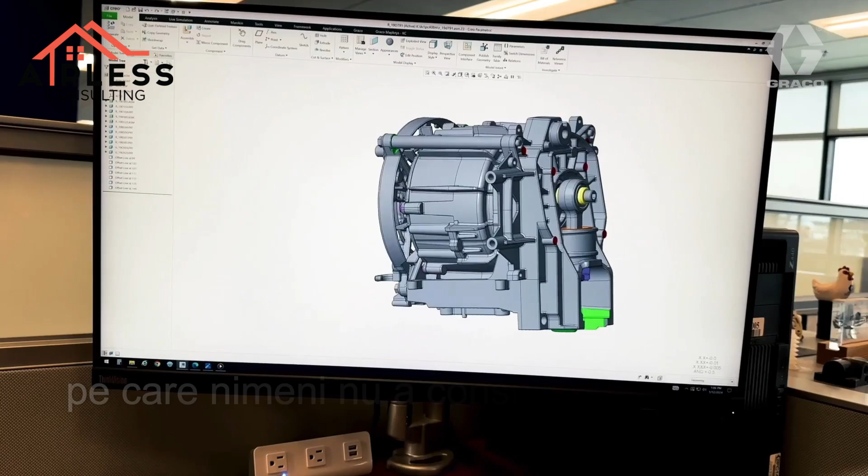Welcome to the future of airless spraying. Experience Airless like never before. Today we take you on a journey which no one even considered to be possible. Today you will experience once again what it means to work with Graco, leading from the front through innovation.

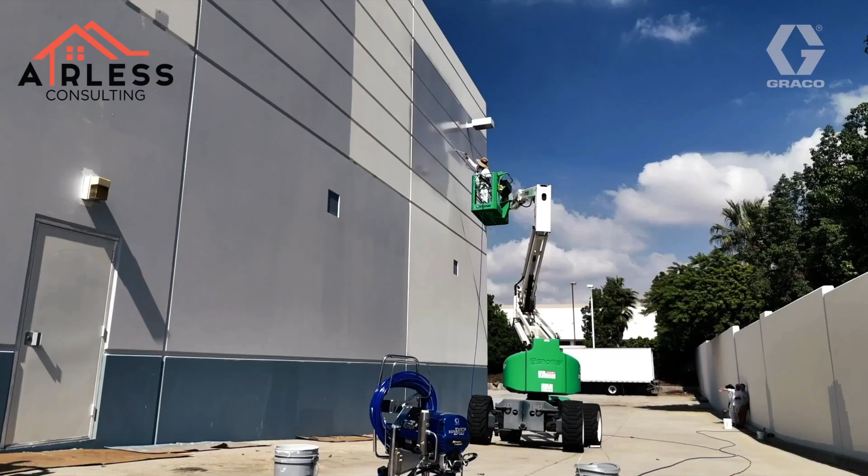Today is about you, our partner in business and success, always striving to deliver the best solutions in the world. With our breakthrough XT motor technology, we deliver the first and only motor specifically designed for airless spray, delivering unmatched performance. XT: Extreme Torque, designed, engineered and manufactured by Graco.

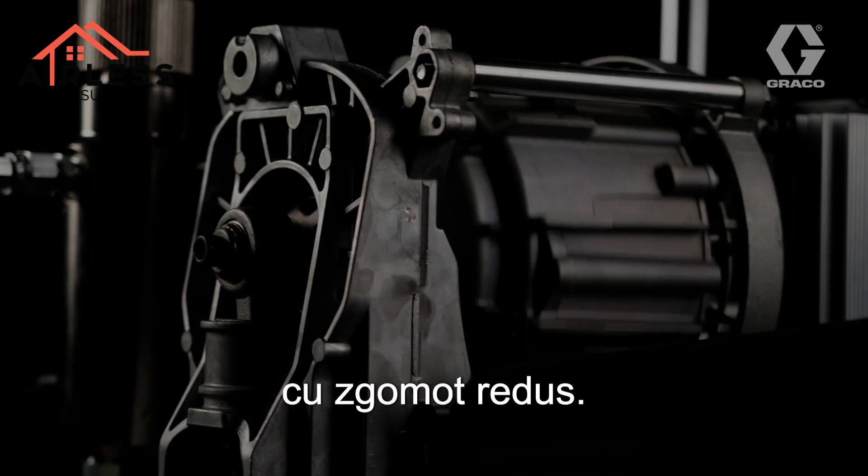Bringing breakthrough spray control and performance, breakthrough pump life and serviceability, breakthrough low noise construction. We have got you covered, now and in the future.

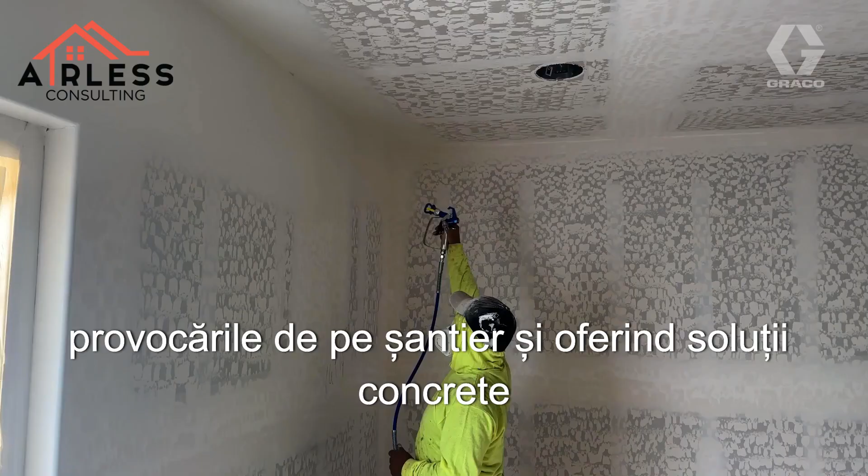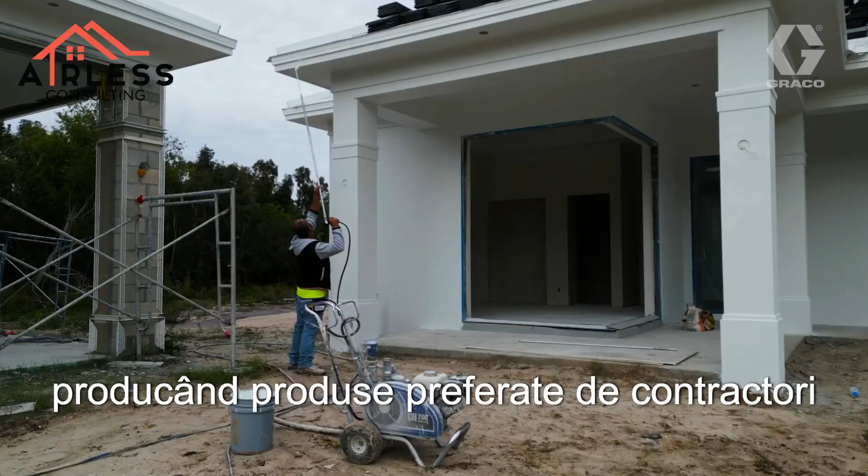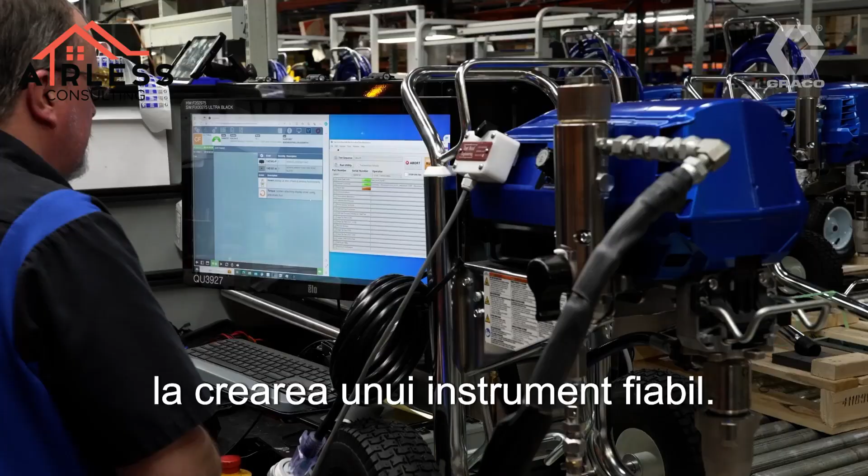By understanding job site challenges and providing concrete solutions to contractors' needs and requirements to get the job done right. By protecting your investment with a range of features during challenging macroeconomic times. By producing contractors' preferred products that are ready to be held by hands that create, transform and inspire. From the spark of an idea to the creation of a reliable tool, this journey showcases the dedication and passion that defines superior manufacturing. From motor to gun, discover the XT difference for yourself and experience Airless like never before.

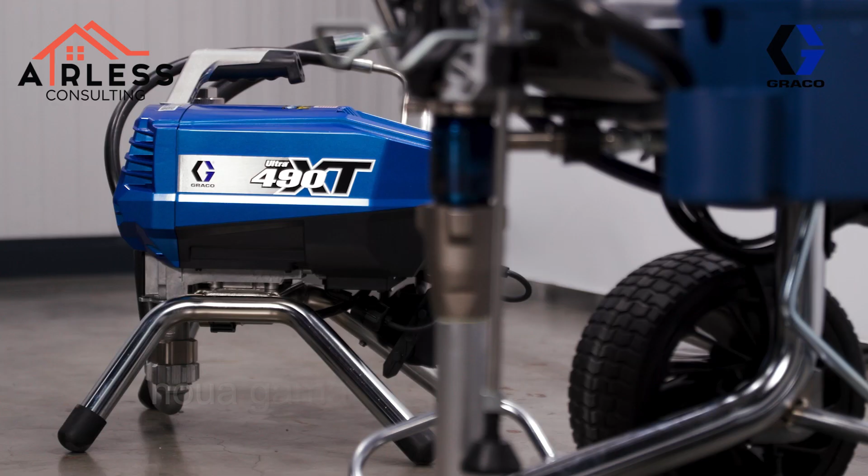Welcome. After years of development, we're thrilled to present the new Ultra XT and Mark XT lineup. These XT sprayers provide our end users with an airless spraying experience they never thought possible, realized through breakthrough motor technology, breakthrough spray control and performance, and breakthrough advancements in pump technology.

Today, we will look at our Ultra XT mid-size sprayers, our Ultra XT large electric sprayers, and our Mark XT sprayers. Let's start with the Ultra XT mid-size sprayers.

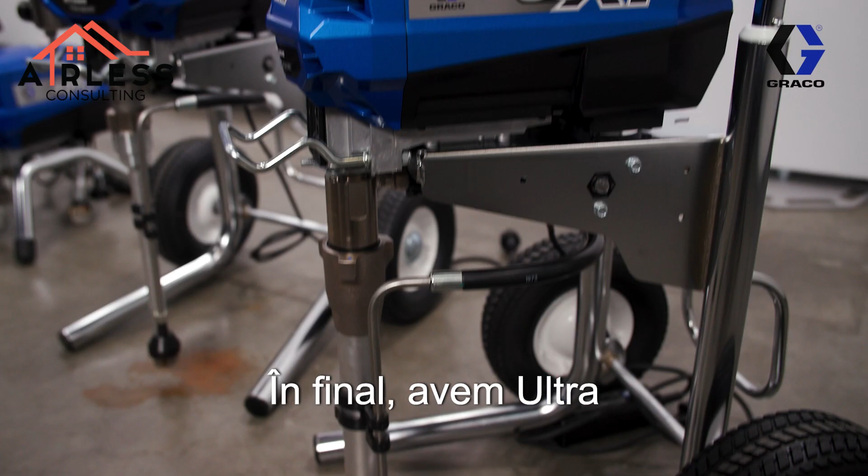Here we have our Ultra XT mid-range sprayers. We start with our 490 XT in both stand and hi-boy versions. Next up, we have our 495 XT, also available in stand and hi-boy versions. Lastly, we have our Ultra 650 XT in hi-boy version.

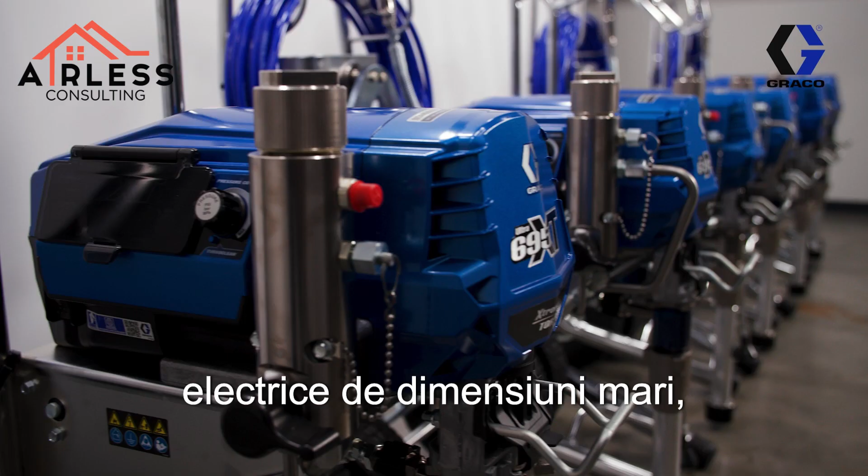For the Ultra XT large electric sprayers, we have the 695, the 795, and the 1095, available in both standard and Pro Contractor versions.

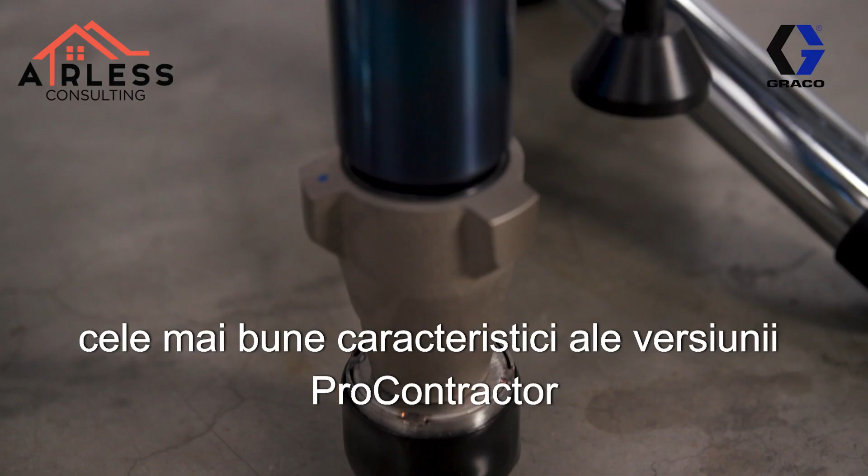Last but not least, we also upgraded the Mark V and Mark 7 to the XT platform. Again, both are available in standard and Pro Contractor versions. One may ask, where did the Ironman go? We decided to combine the best features of the current Pro Contractor and the Ironman into the new Pro Contractor version. This means going forward, we will not offer a separate Ironman version anymore.

Now, let's dig a bit deeper and look at the heart of the sprayer, namely the motor.

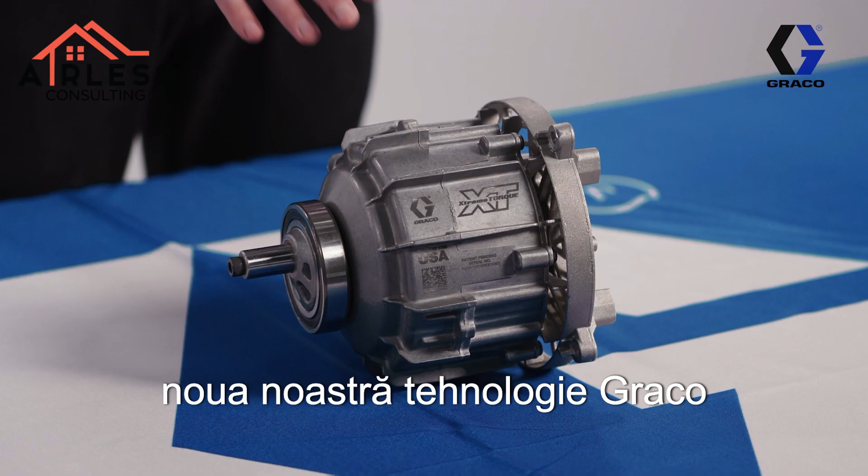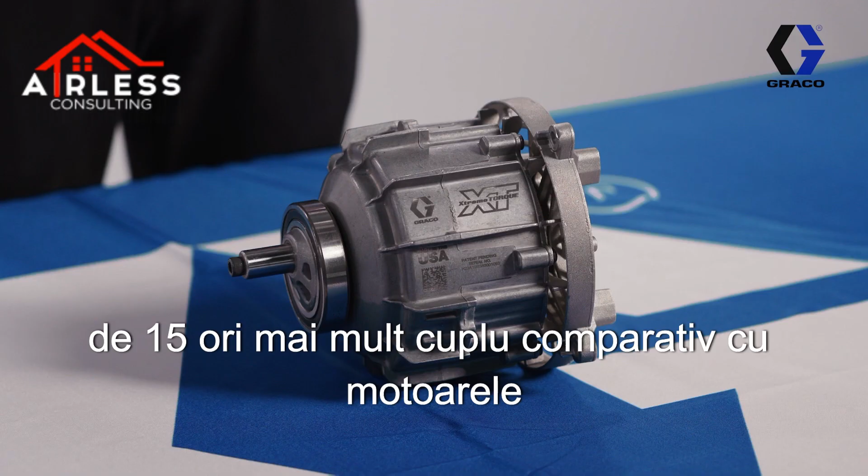We're proud to present our new Graco Extreme Torque motor. This is the first motor specifically designed, engineered, and manufactured for airless spray. It has 8 times more magnets and delivers 15 times more torque compared to traditional multi-purpose motors used in dryers, furnaces, and other home appliances.

Now, that may all be a bit theoretical, so let's watch a clip and see what 15 times more torque looks like.

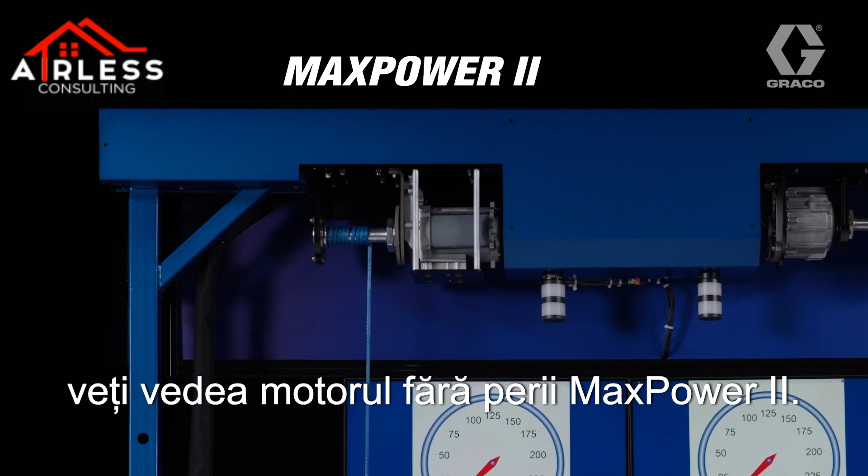Let's talk about the extreme torque difference and what it means for the products you sell today. To my right is our gantry system. At the top left you'll see the MaxPower II brushless motor, standard in all Graco brushless products today, and at the right the all-new Extreme Torque motor, standard on all XT products. The gantry is a great way to test the true torque of each motor. Directly connected to each of their shafts, we'll see how much weight we can pull.

First, let's start off with the MaxPower II brushless motor. You'll see the MaxPower II brushless motor is only capable of lifting 30 kilograms. This is the industry standard and what contractors are used to today.

Graco has something new and better than ever, the new Extreme Torque motor. Let's see what it can lift. You'll see the Extreme Torque motor is capable of lifting upwards of 50 kilograms. That's a lot more torque, but that's not all. The Extreme Torque motor is capable of lifting upwards of 230 kilograms. That's a lot of torque, and that's the Extreme Torque difference.

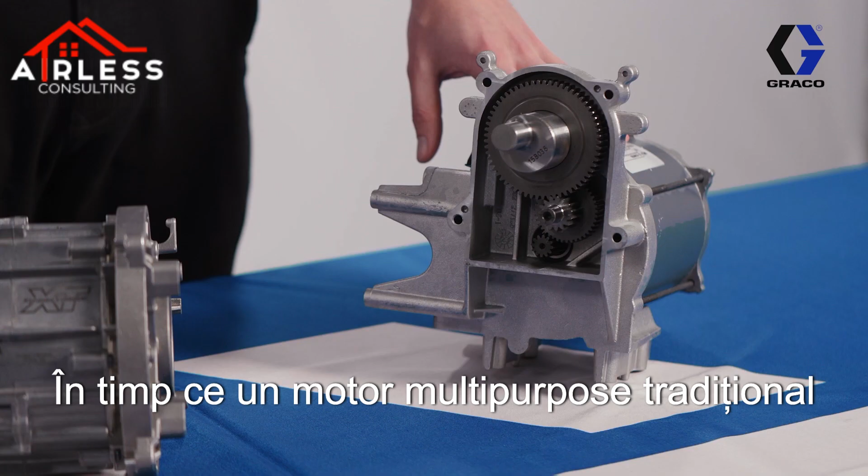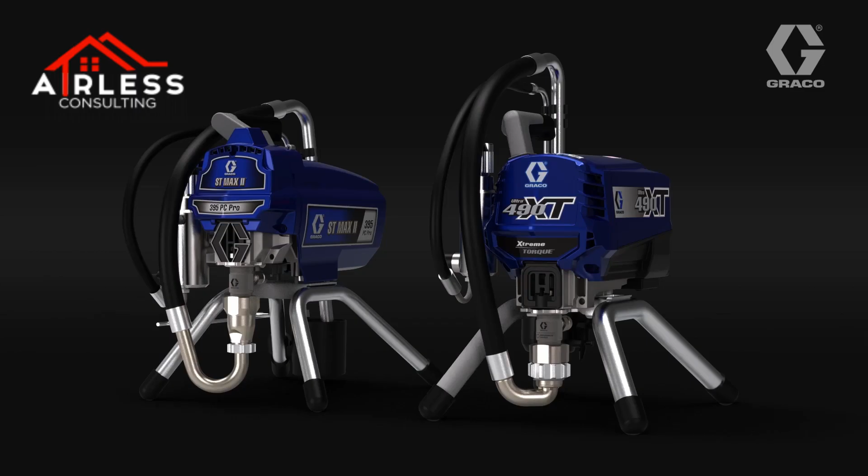While a traditional multi-purpose motor runs at 3,000 RPMs, our new Graco Extreme Torque motor runs at only 300 RPM, which is 90% slower. This enabled us to take out the dual-stage gear train for the mid-size electrics and go to a direct drive design. For the large electrics and the Mark XT units, we went from a dual-stage gear train to a single-stage advantage drive.

Now, the first thing end users actually notice about our new XT sprayers is how quiet they are. Now let's listen to the new sound of quality.

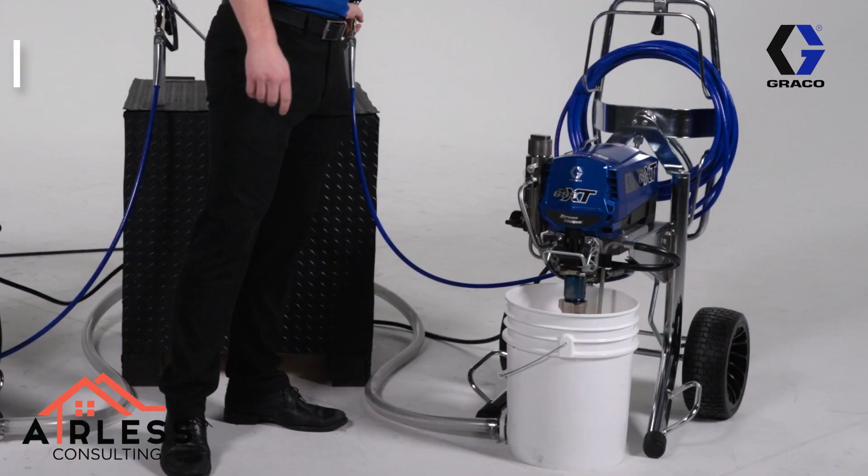Now let's have a look at how the new XT motor is integrated into our units. As you can see, the new XT motor is a lot more compact. This allowed us to move the control from the side of the unit to the back of the unit.

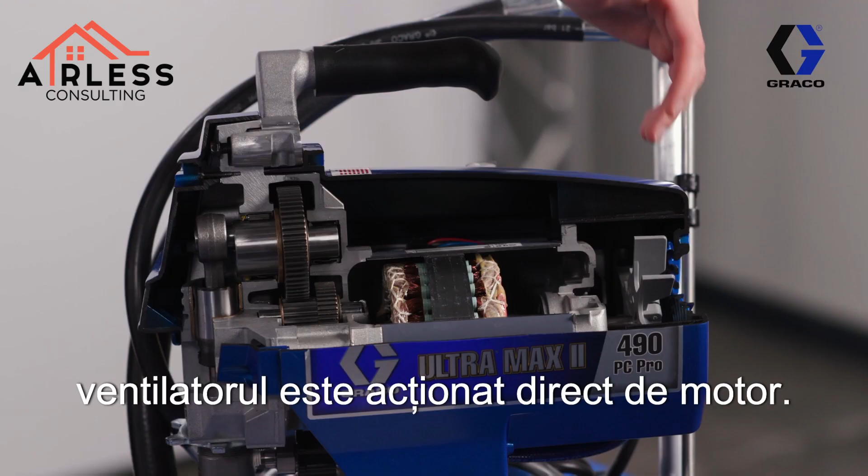Also, with a traditional multi-purpose motor, the fan is directly driven by the motor. With the new XT sprayer, this is not the case anymore. Now the fan is only turned on when the unit needs to be cooled, and the fan position has been moved down to the bottom of the sprayer. Also, our new XT motor is a lot lighter, reducing the overall package of our sprayer.

Now let's have a look at how our new XT sprayers provide breakthrough spray control and performance. All XT sprayers come with our new rapid response pressure control. It means that the units instantly respond to deliver the best finish quality.

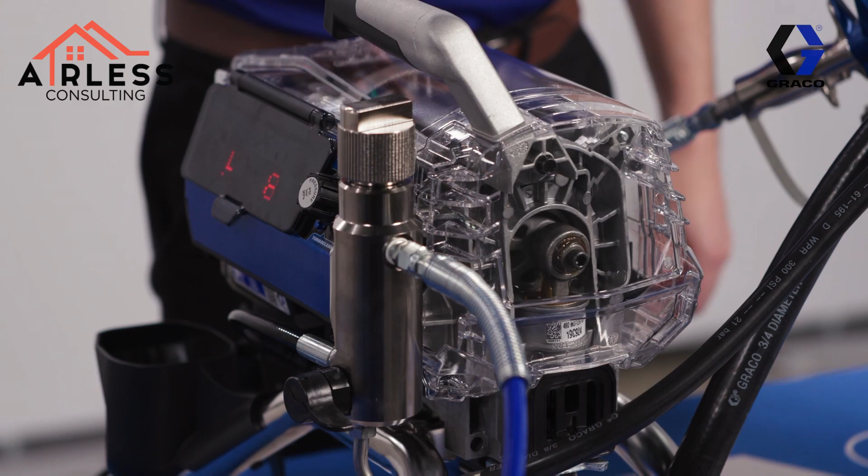With our new XT motor, we can monitor pressure 60 times per motor revolution. Moreover, we can speed up the motor for pump changeovers. The result: the world's steadiest running pressure.

In front of me, we have an Ultra 490 XT with clear shell to show you how our new XT motor is able to speed up for the pump changeovers. As you can see here, it speeds up and then slows down again.

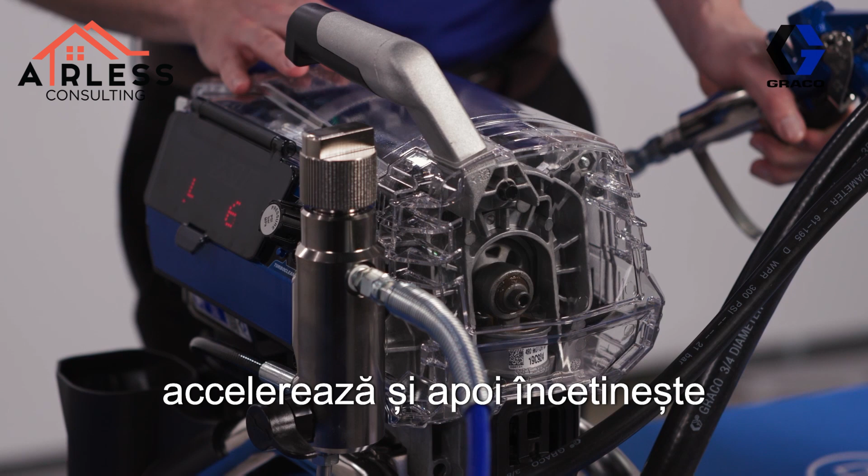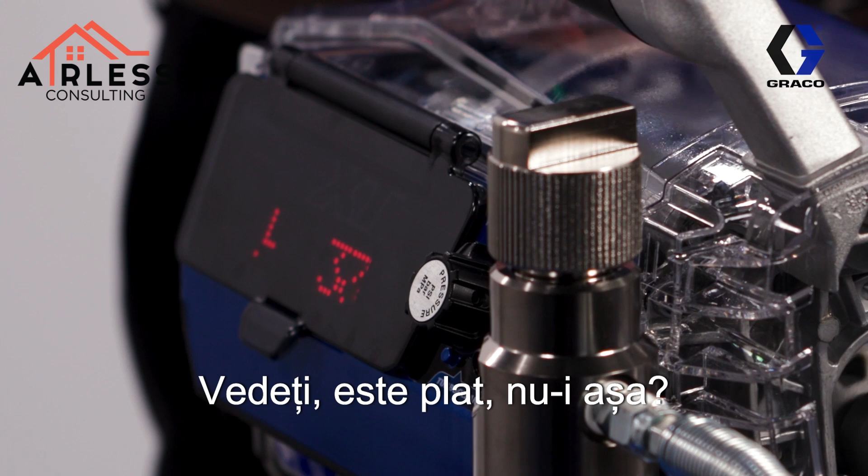Now let's have a look at our running pressure. See, dead flat, right? What you have just seen is the world's steadiest running pressure.

Now, some of you may have also noticed that we're reading out the pressure from a new display module. This will actually be available on all new XT sprayers, even on the standard version. Now, while we're at it, let's have a closer look at our new LED display module.

On the right-hand side, we have our menu button. This can be used to show pressure readout, job or lifetime liter counter, and self-diagnostics. On the left-hand side, we have a new button, the performance mode button.

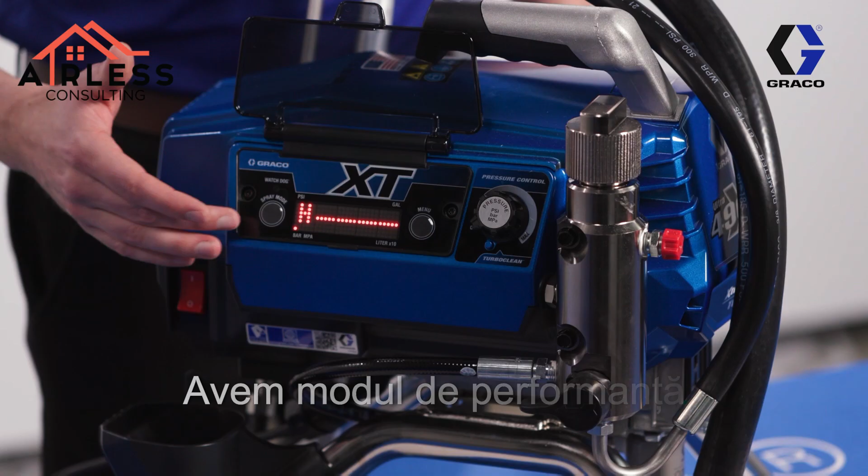With this button, we can easily switch between the two selectable performance modes. We have the low pressure performance mode, and we have the high pressure performance mode. These two modes enable the best finish quality for every application.

Let's start out with the low pressure performance mode. The low pressure performance mode was developed to avoid overpressurizing your paints. This reduces overspray, paint consumption, and results in a better finish.

The low pressure performance mode is engineered to be used with our green fine finish low pressure tips and our neon low pressure tips. In this mode, the pressure ranges between 3 and 140 bar, and you can dial it in with 1 bar increments. This makes it very easy to set your exact needed pressure. Also, the spray pressure will be nearly identical to your set pressure.

Sometimes, however, 140 bars just isn't enough. With the push of a button, we can go to the high pressure performance mode.

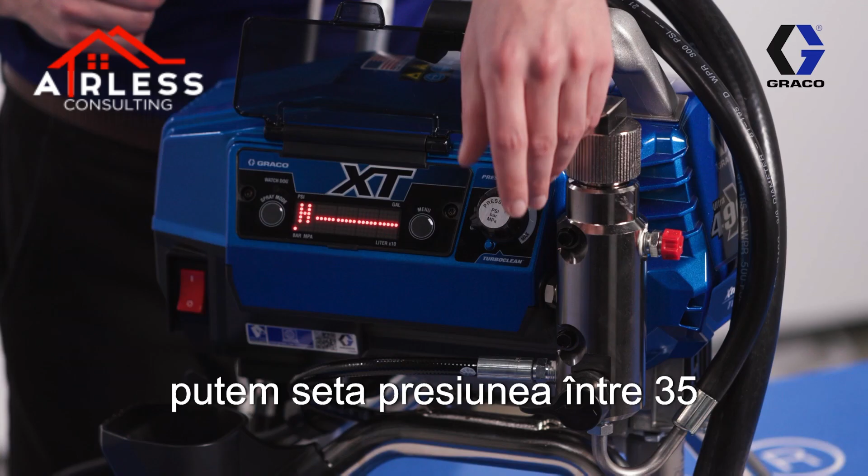This mode delivers the full capabilities of the unit, and we can go up to 227 bars. This mode is designed to be used with harder to atomize materials when running longer hose lengths or when spraying in colder conditions. In the high pressure performance mode, we can set the pressure between 35 and 227 bars with increments of 3 bar. This is also the performance mode in which the units will ship.

Welcome to our spray booth. Over here, we will show you how we can achieve superior finish quality thanks to our low pressure and high pressure performance modes. Next to me, I have our new Ultra 490 XT sprayer with the hopper kit filled with a lacquer. Of course, when we unbox the unit, we know it comes shipped in the high pressure performance mode. For a lacquer, we obviously need to go down to the low pressure performance mode. This can be achieved with just the push of a button.

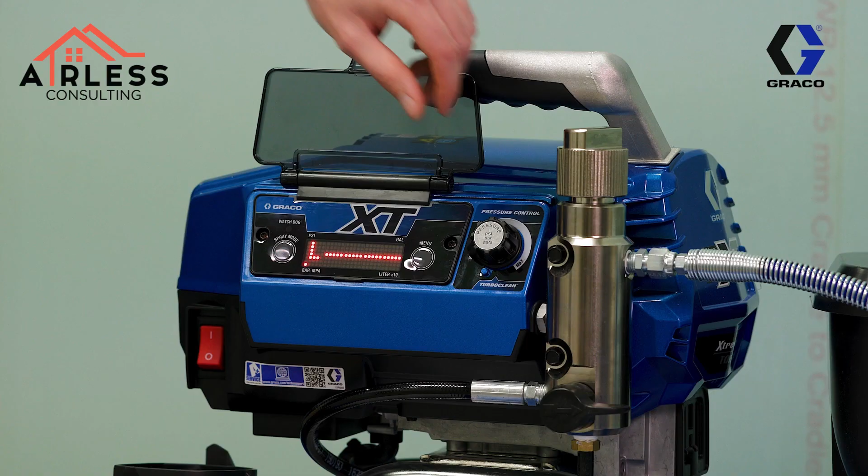Let's see how easy it is to set our new XT sprayers to the exact pressure of 45 bars. See? It's just that simple. And now let's do some spraying and show you how these XT sprayers provide the world's steadiest running pressure to achieve the best possible finish quality.

So as you have just seen, our new XT sprayers provide the world's steadiest running pressure, achieving the most consistent spray pattern.

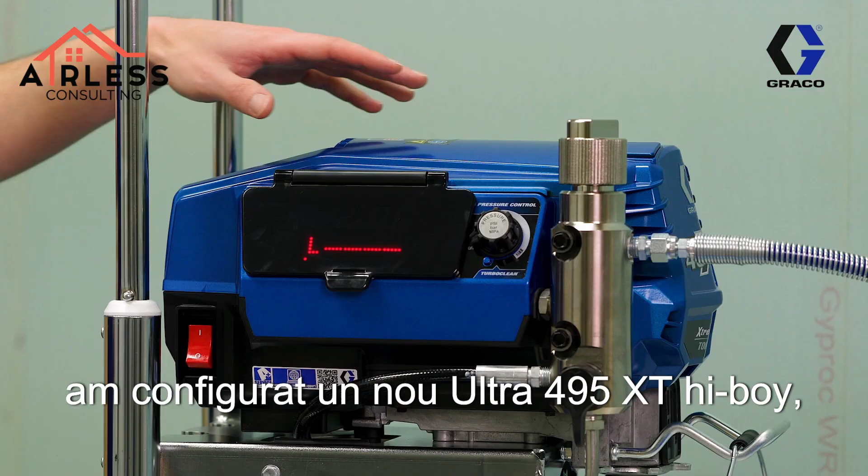For the second part of our spray demo, we have set up a new Ultra 495 XT hi-boy with a typical wall paint. As you can see, the unit is already set in the low pressure performance mode. We did this because we actually found during field testing that most wall paints can be atomized in the low pressure performance mode. We know this particular paint can be atomized at 90 bar.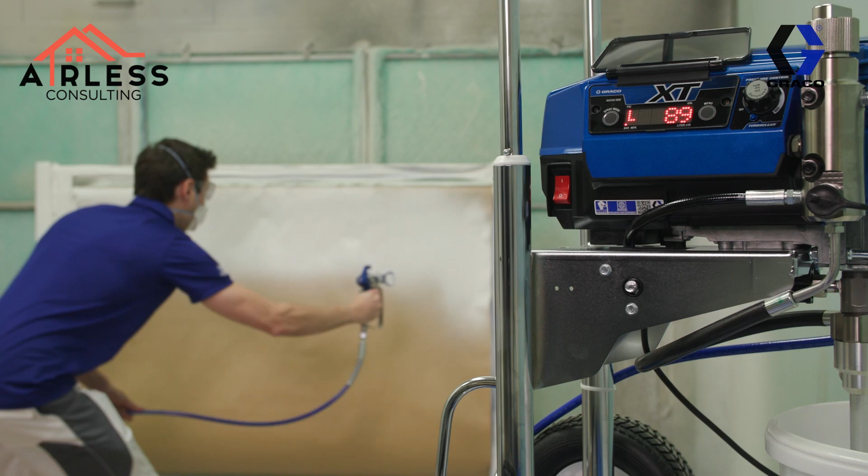Once again, we can see how easy it is to dial in your exact needed pressure. Let's do some spraying. Impressive how steady the running pressure was with our new XT sprayers using a wall paint.

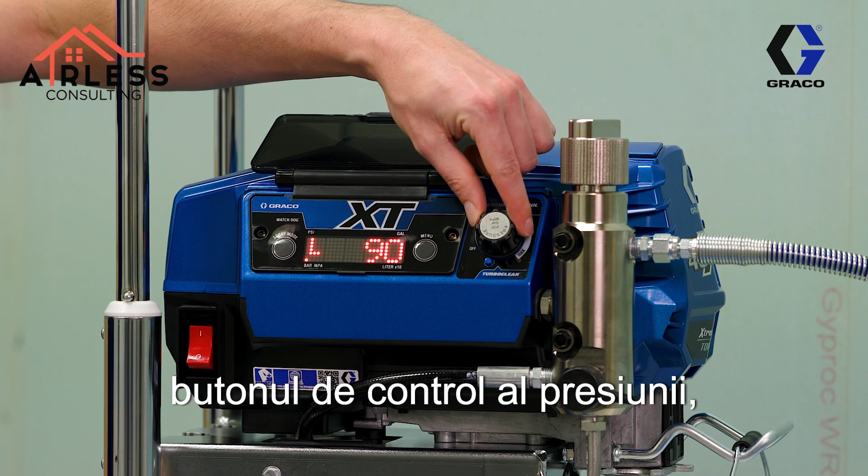Now, for some harder to atomize materials or when running longer hose lengths, the 140 bar of the low pressure performance mode just isn't enough. But with the push of a button, we can go to the high pressure performance mode. We advise you to slightly dial back the pressure control knob, then go into the high pressure performance mode, in which you can go all the way up to the max pressure of 227 bars.

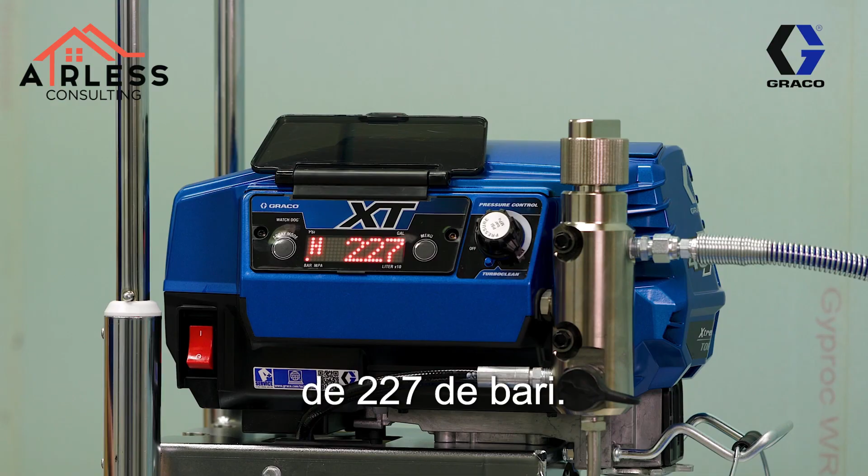This covers it for the spray demo. Now let's see what other breakthrough features XT sprayers have in store for you. We have more to show.

Watchdog, the Graco feature which prevents pump damage when material supply is too low by automatically shutting off the pump, is now available on all XT sprayers. Watchdog can be easily enabled or disabled by holding down our performance mode button for 3 seconds. The LED indicator light indicates the status of Watchdog.

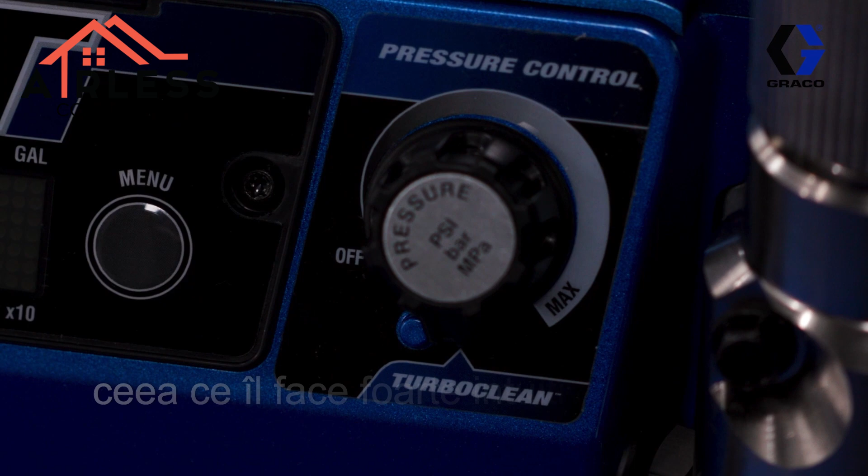Another new feature we have available on all XT sprayers is our Turbo Clean. Turbo Clean drives our XT motor to max speed to deliver the high velocity fluid flow that cleans the pump 6 times faster by using half the fluid. Turbo Clean is now located at the end of the pressure control knob, which makes it very intuitive to use.

Next, let's have a look at a crucial part of our sprayer, the pump. Also here, XT brings breakthrough advancements to deliver longest pump life and on-the-job serviceability.

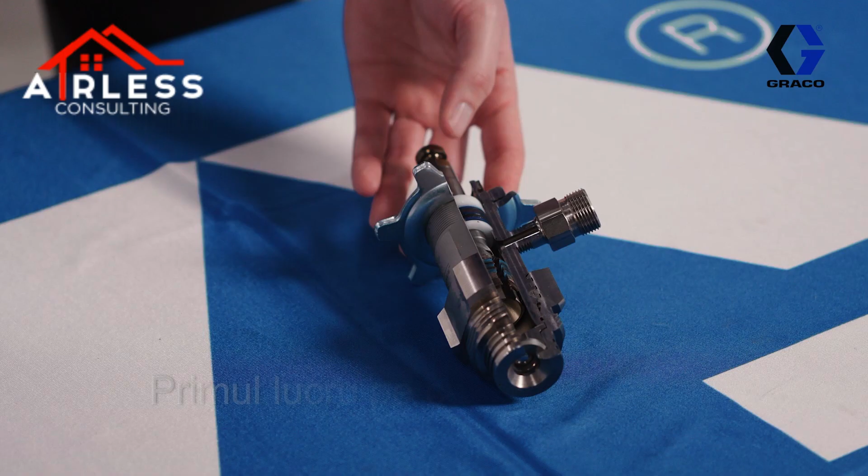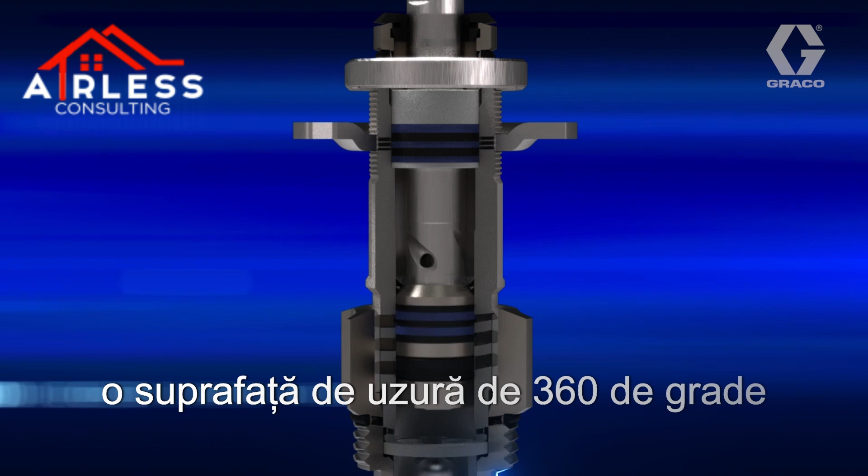In front of me, we have a pump cutout of the new Ultra 490 and 495 XT. The first thing we notice is that the Vortex rotating piston rod technology will now be available on all XT sprayers. A Vortex rotating rod automatically rotates while pumping, delivering a 360 degree wear surface and virtually eliminating side loading, providing 3 times longer life compared to competitive pumps.

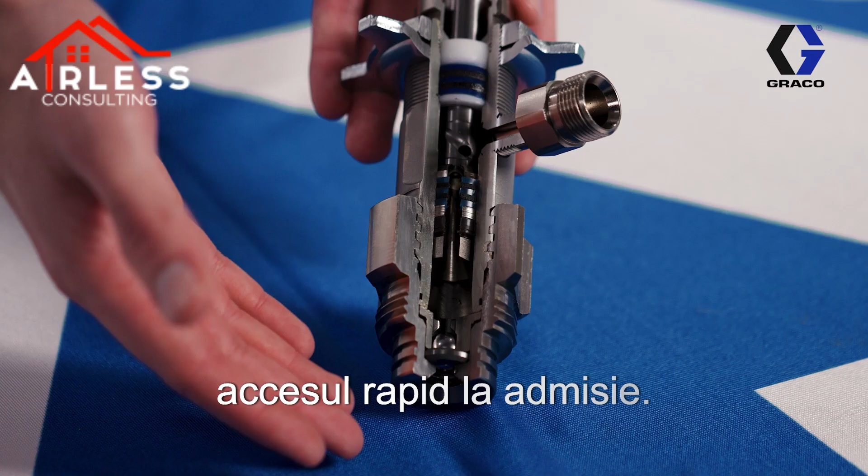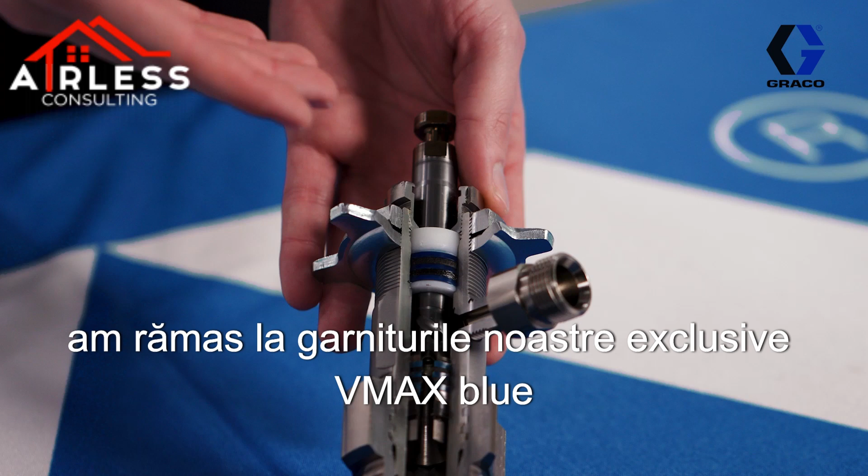Also new is the quick access intake. This delivers faster priming and easier access to the inlet ball. With regards to the packings, we have stayed with our proven exclusive VMAX blue packings. All these improvements carry over to the large and Mark XT units.

For the 695 and the 795 Pro Contractor, the pumps will have the Max Life coating. For the 1095 XT, the Mark V XT and the Mark VII XT Pro Contractor series, the pumps will receive the Vortex Max Life Extreme coating. With all these improvements, we have significantly increased pump life before service.

Let's have a look and visualize this. With our Endurance Vortex technology, which is included on all standard XT series, we can already pump 3 times more liters before repack compared to our competition.

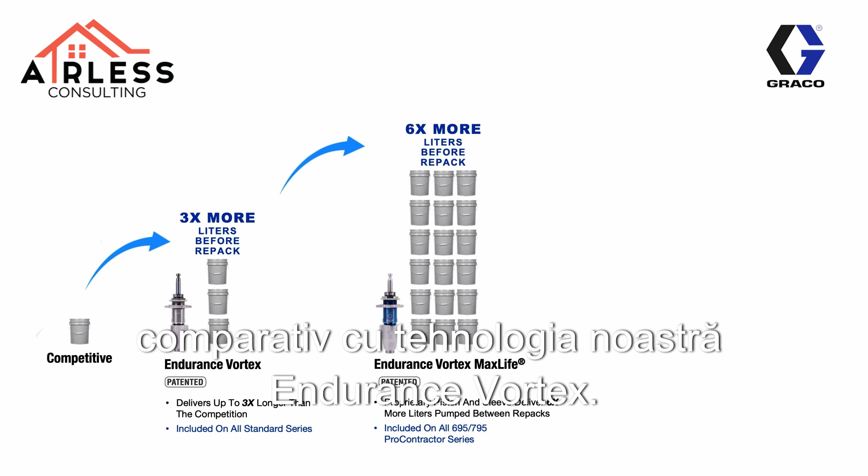Going to the Endurance Vortex Max Life pumps, we can pump 6 times more liters before repack compared to our Endurance Vortex technology. The Endurance Vortex Max Life coating is included on the 695 and the 795 XT Pro Contractor sprayers.

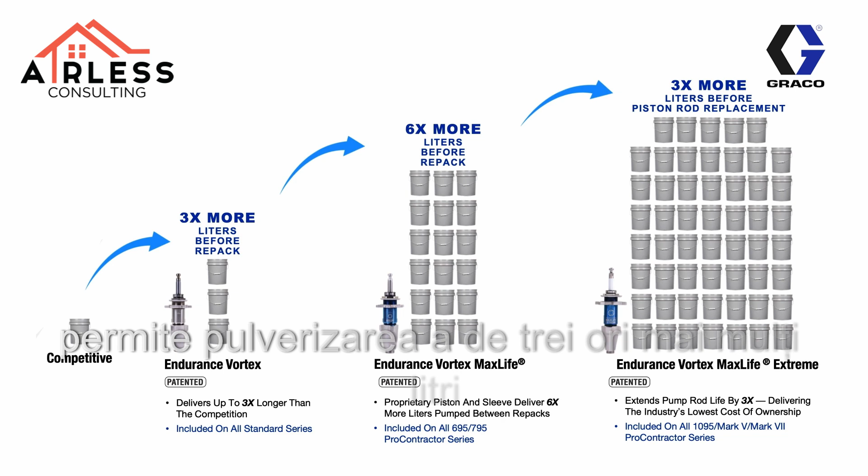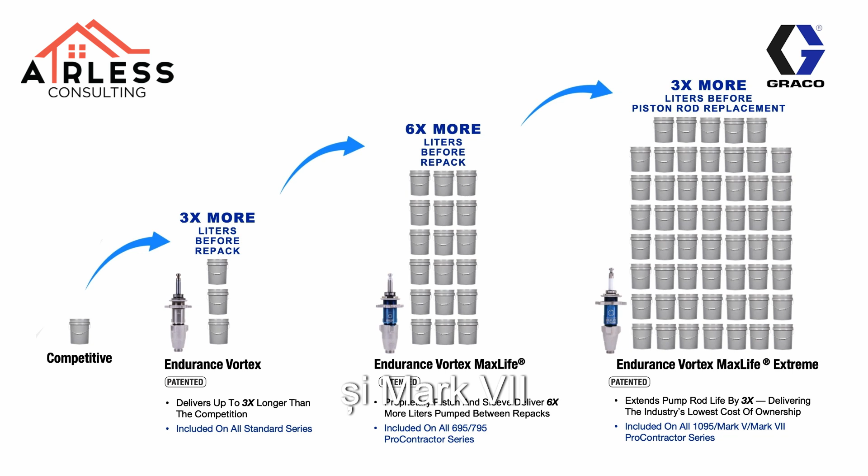On the top end, we have our Endurance Vortex Max Life Extreme coating. This coating provides 3 times more liters to be sprayed before piston rod replacement compared to our Endurance Vortex Max Life coating. The Max Life Extreme coating is included on the 1095, the Mark V, and the Mark VII XT Pro Contractor series.

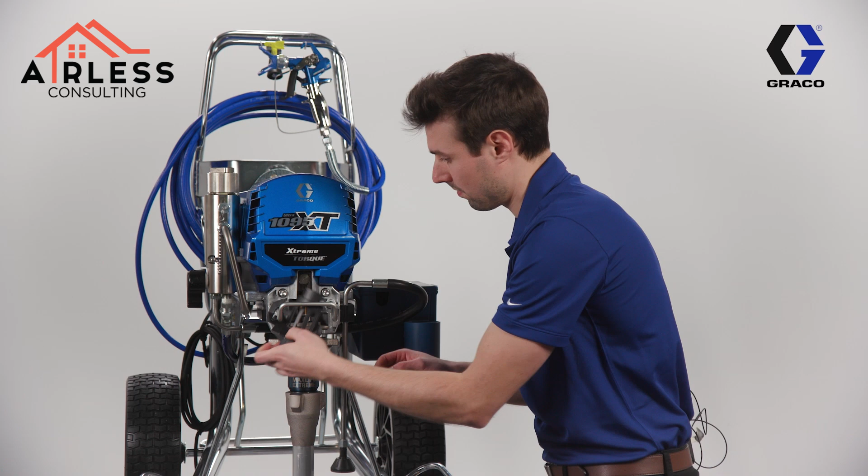Next to longest pump life in the industry, we also offer quickest serviceability on the job, thanks to our ProConnect technology. This is now available on all XT sprayers. By just using one simple tool, we can easily remove the pump, replace it with a new one, and get you back to spraying in a matter of seconds.

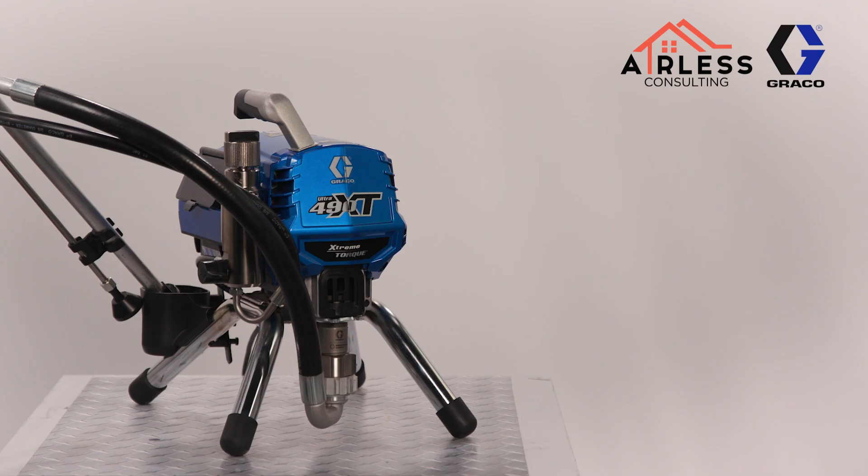By now, we have covered the XT benefits. Let's do a quick recap. We start with our Ultra 490 to 650 XT mid-size electric sprayers.

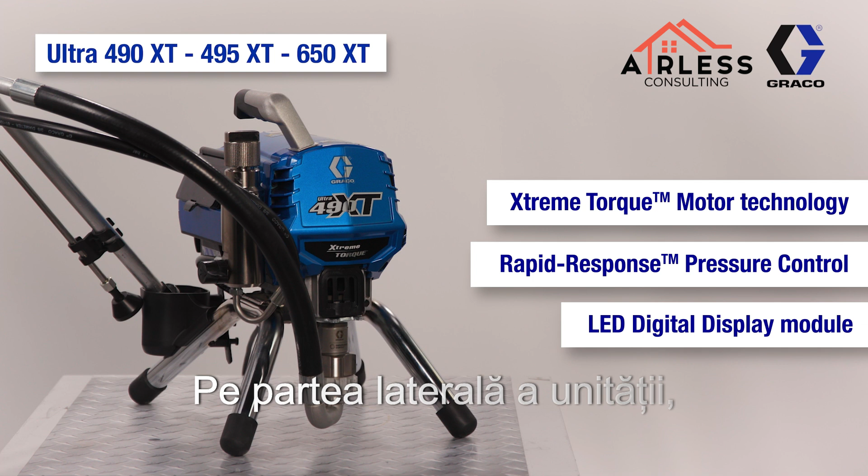At the heart of our sprayers, we have the Xtreme Torque motor technology. Our rapid response pressure control provides the world's steadiest running pressure and best finish quality. On the side of the unit, we have the new LED digital display module, on which we can find the selectable performance mode.

Here, we also find our watchdog pump protection function. Next to the digital display, we have the pressure control knob, used to engage our Turbo Clean cleaning system for fastest cleaning. The mid-size sprayers also feature the Endurance Vortex pump with ProConnect for longest life and on-the-job serviceability.

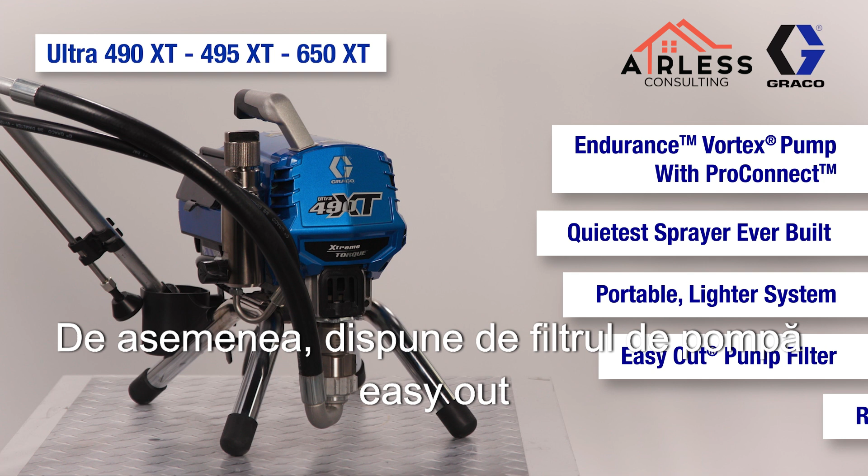It's the quietest sprayer ever built, being up to 10 times quieter compared to current sprayers. Furthermore, it's a lighter, more portable system. Also, it features the easy-out pump filter and a rugged, durable frame.

For the large Ultra XT and Mark XT standard sprayers, we have the Xtreme Torque motor technology at the heart of the sprayer. Here it connects to the piston rod through our single-stage advantage drive. Our rapid response pressure control provides the world's steadiest running pressure and best finish quality.

On the side of the unit, we have the LED digital display module on which we can find the selectable performance mode and also our watchdog pump protection function. Next to the digital display, we have the pressure control knob, used to engage Turbo Clean cleaning system for fastest cleaning.

On the standard series, we have our Endurance Vortex pump with ProConnect for longest life and on-the-job serviceability. Furthermore, it's the quietest sprayer ever built, being up to 10 times quieter compared to current sprayers. Also on there is our easy-out pump filter system, and the unit is built on a rugged, durable frame.

The Pro Contractor series has all standard features, plus the Endurance Vortex Max Life pump on the 695 and the 795 XT. The 1095, Mark V, and Mark VII XT Pro Contractor come equipped with our Endurance Vortex Max Life Extreme pump. Furthermore, these Pro Contractor units are equipped with our quick reel hose management system, highly valued by many end users.

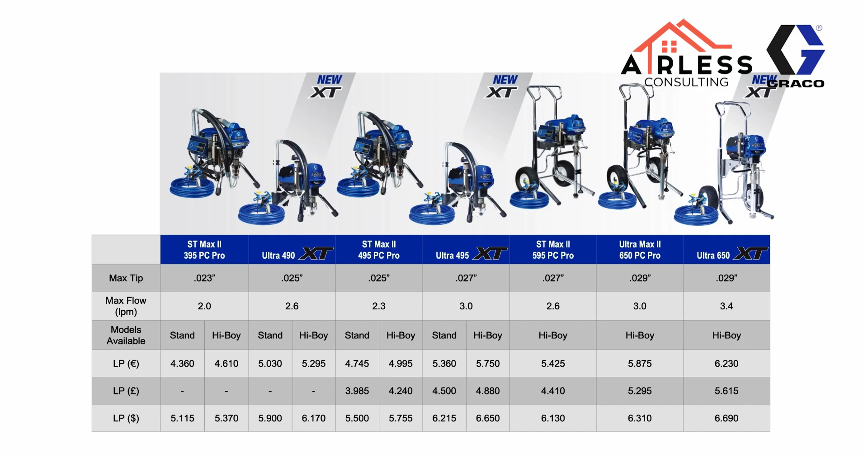Now, let's have a look at the complete 2024 lineup. We start out with the 2024 midsize electric airless lineup. For the midsize electric sprayers, we keep all our current ST Max sprayers in our offering. On top of that, we are adding our 490, 495, and 650 XT sprayers to the lineup.

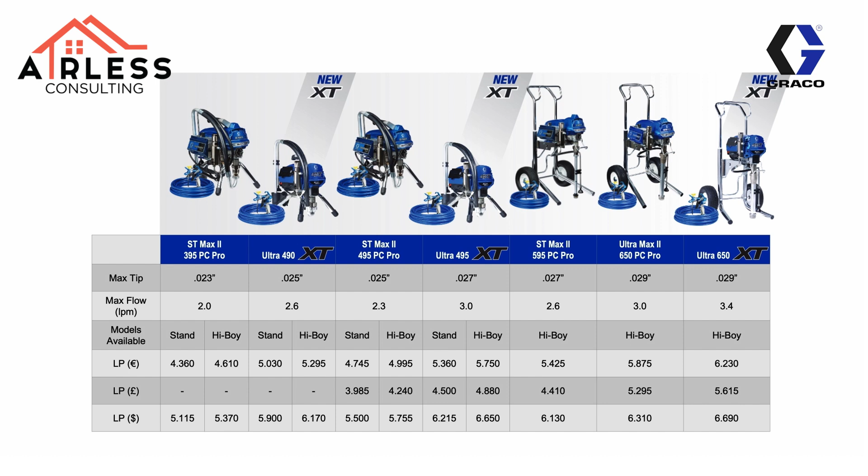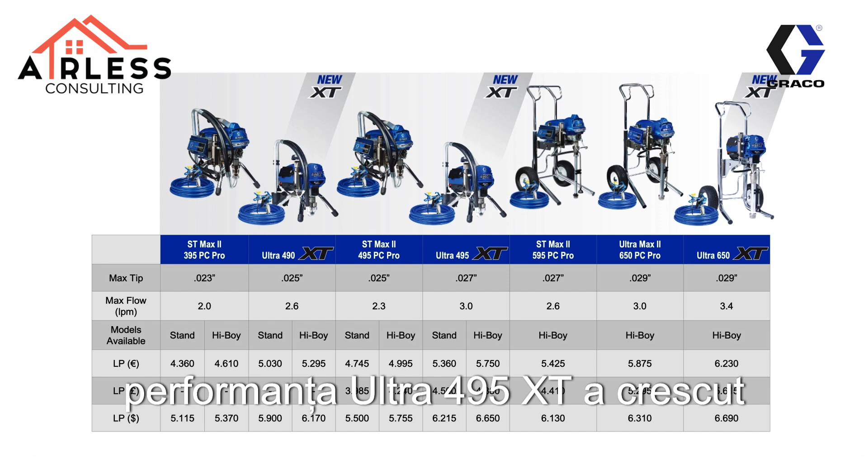Whereas the ST Max lineup starts out with a 23 tip support, the new Ultra 490 XT already supports a 25 tip size. As a consequence, the Ultra 495 XT's performance has increased with one tip size to 27. You will also have noticed the maximum flow of our new Ultra XT units has increased with an average of 10%.

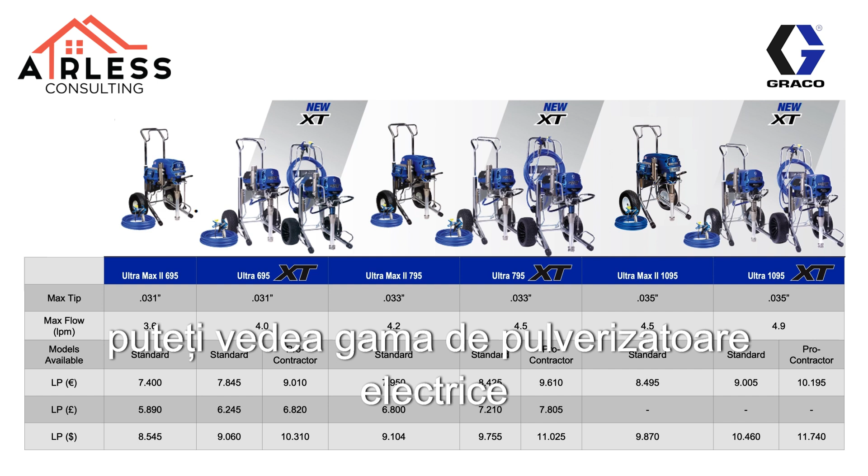On the next slide, you can see the 2024 large electric airless lineup. For the large electric sprayers, we keep the current standard Ultra Max sprayers in our offering. Of course, we will be adding the Ultra 695, 795 and 1095 XTs in both standard and Pro Contractor versions. Just as with the midsize XT sprayers, the max flow has increased around 10% across the board for our XT sprayers.

For the Mark range, we decided to discontinue the Mark IV models, meaning the Mark lineup starts from the current Mark V standard. On top of that, we will have the new Mark V XT in both standard and Pro Contractor version. We also keep the Mark VII standard in our lineup and add the new Mark VII XT in both standard and Pro Contractor version. Our industry-leading Mark X standard and Pro Contractor sprayers remain unchanged. Overall, we will not continue to offer any Ironman model going forward.

This concludes our presentation of our new breakthrough Graco XT sprayers. Now let's go over to my colleague Boris, who has another exciting product in store for you.

Thank you, Peter. Hello everyone, I'm here to introduce you to yet another great innovation by Graco, but before I do, let's go back to more or less 1 year ago.

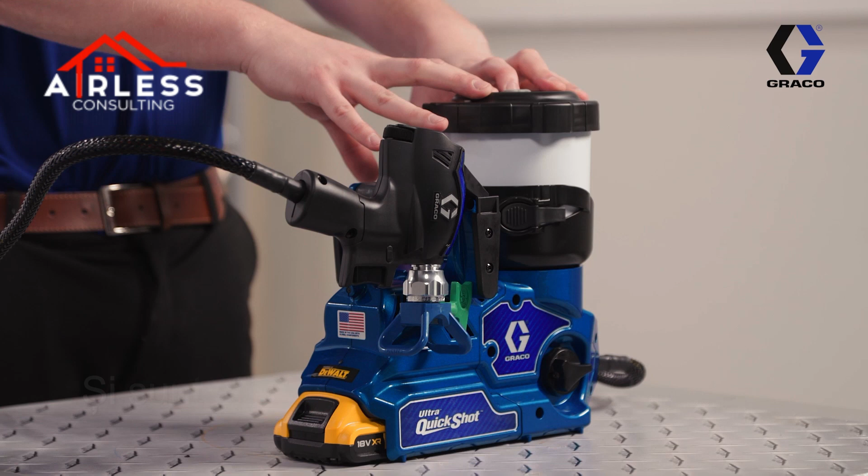As you all know, last year we launched the Graco Ultra Quickshot that you see right here, and this has been one of the most successful product launches ever in Graco's history, and I'm sure you guys can all confirm that. Thousands of contractors have been vocal about how this gun technology has been a game changer for their business, and I'm really talking about all sorts of contractors, whether they're residential repainters or commercial contractors. All of those contractors really valued the fastest trigger speed, the fact that this gun virtually eliminates spits and gives you the best possible airless finish quality. This gun has the lightest trigger pull and is also the lightest weight airless gun on the market today.

When we as Graco go into the markets and we talk to you guys or we talk to end users and contractors, we often get the question whether they can connect their Ultra Quickshot gun to their larger airless sprayer. And that is exactly what we did. Graco listened to your feedback, Graco listened to customer needs, and we developed the Contractor PowerShot.

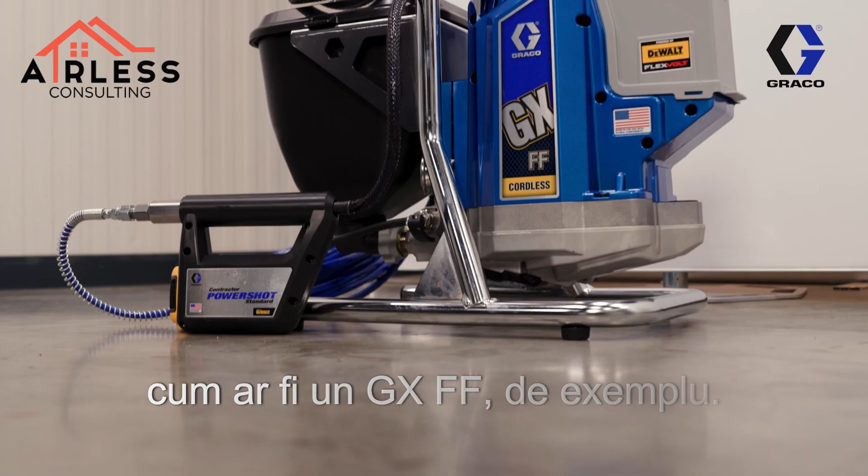Here it is. What I have here in my hand today is the world's first electronic airless gun that can be attached to any airless sprayer. And when I say any airless sprayer, I really mean literally any airless sprayer. Whether that's a smaller paint unit like a GX FF, for example, whether that's a complete brand new Ultra 495 XT or any Ultra XT sprayer that you saw earlier today, or whether that's a current generation of Graco sprayers or even a very old Graco sprayer and even a competitive unit, you can attach this gun to any airless sprayer.

With the Contractor PowerShot gun, using a 1/4-inch hose, you will be able to virtually eliminate spits, reduce operator's fatigue, improve your finish quality, have the fastest service on the job site possible, and also enjoy easy hose management.

The Contractor PowerShot gun is the lightest airless gun ever built in the market. It's even 30% lighter compared to the Contractor PC gun, which is still the leading industry gun today. It also has the lightest trigger pull and hold force. Comparing it to the Contractor PC gun, it's even 80% lighter.

We've talked about the Ultra Quickshot before, and as you all know, the Ultra Quickshot is made for small jobs, whereas this Contractor PowerShot gun can be used for any paint job. Whether that's a small fine finish job, or a larger commercial job where you have to spray all day, this Contractor PowerShot gun will do it without any issues.

That's also why we made some small modifications compared to the Ultra Quickshot gun. If you look at the handle, we've made the handle a little bit bigger, and we also made it a 2-finger trigger instead of a 1-finger trigger. That will ultimately reduce the operator's fatigue, and it will make sure you can spray comfortably all day long.

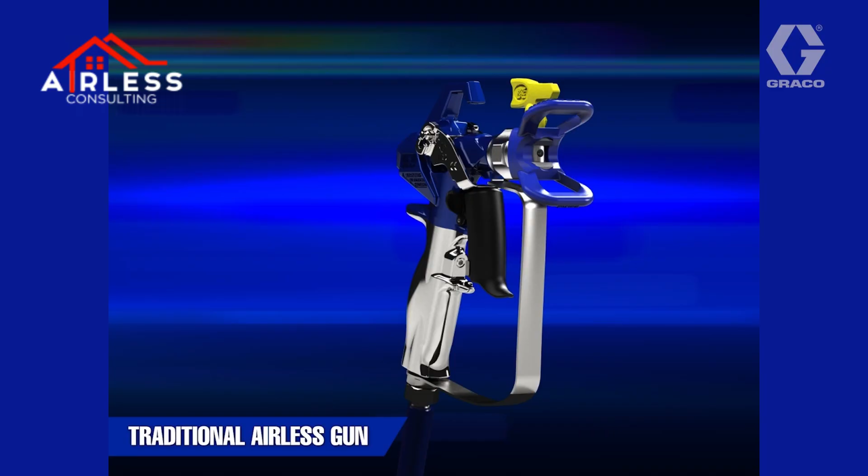Here you'll see a traditional airless gun with a mechanical trigger pull. The trigger speed is fully reliant on the operator. Poor technique leads to more frequent and larger spits. There's also a larger needle travel, and it takes longer to open and close, resulting in spits in your spray pattern.

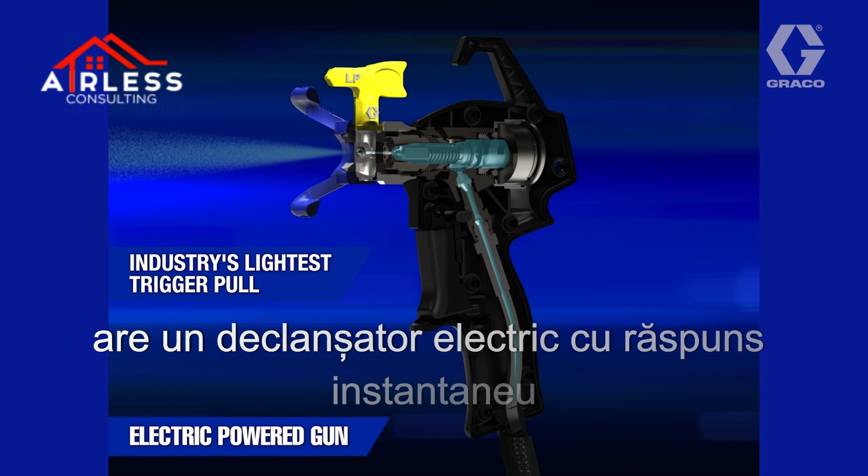The Contractor PowerShot has an instant response electric power trigger that removes the human element, giving you up to 80 times faster trigger speed. With a shorter needle travel to open and close, the Contractor PowerShot will virtually eliminate any spits, giving you a perfect airless finish quality.

Another thing I'd like to highlight on this gun is the serviceability that contractors demand. You all know the Contractor PC gun and the ProConnect replacement cartridge that comes with it. We've taken that concept and created an exclusive PowerShot ProConnect replacement cartridge. This cartridge ensures the fastest service on the job site and reduces your downtime to the absolute minimum. It combines the needle and all wear parts into one simple part, so it's very, very easy. How does that work?

You take off the guards, you wrench off the old cartridge, you take a new cartridge, and make sure you wrench it tightly. And that's it — within a couple of seconds, you have a complete brand new gun.

The serviceability doesn't only extend to the replacement cartridge. If needed, you can also replace the solenoid on the gun, you can replace the gun clamshell, you can replace the trigger, and you can replace all hoses that come with this gun.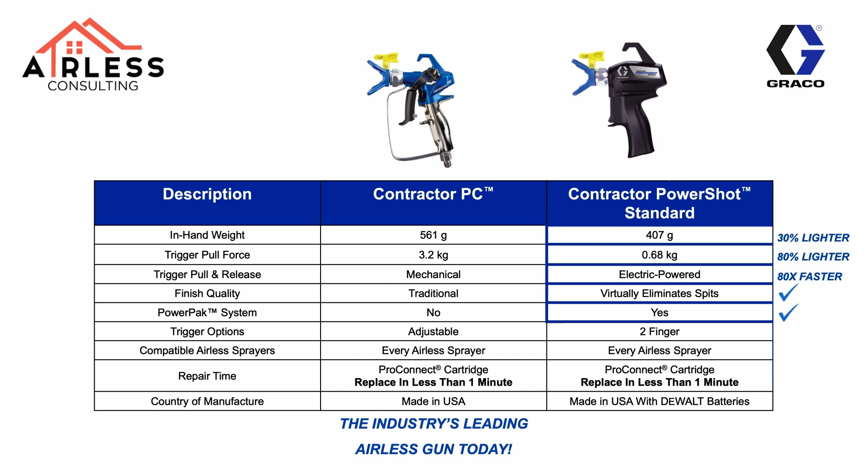Now let's have a look at what comes with the complete PowerShot package. We've already talked about the gun. On the gun, there's a flexible whip hose connected, 1/8 inch and 1.8 meters. It's actually the exact same hose that comes with the Ultra QuickShot gun, so it's proven design, proven performance, and extremely flexible to provide superior spray control and reduce user fatigue.

On the other side of the hose, there's an all-new power pack system included. It has an ergonomic handle so you can carry it around anywhere you want. It's powered by a DeWalt 18-volt 2 amp battery, just like the QuickShot and the handhelds, and it's actually delivered with 2 batteries and a charger. With a fully charged battery, you can spray all day long with your PowerShot gun.

On the other side of your power pack, there's a material supply hose connected. That hose is 1/8 inch and 30 centimeters long, and it also has a swivel, which ensures easy, tangle-free hose management and allows contractors to fit into tight spaces and smaller areas.

Something else I want to highlight is the superior filtration we've added. Right here there's also a filter connected, and I'll show you right away how to connect and disconnect it. This keeps the debris out of your spray pattern, ensuring the best possible finish quality. So let's have a look at how to get to your filter.

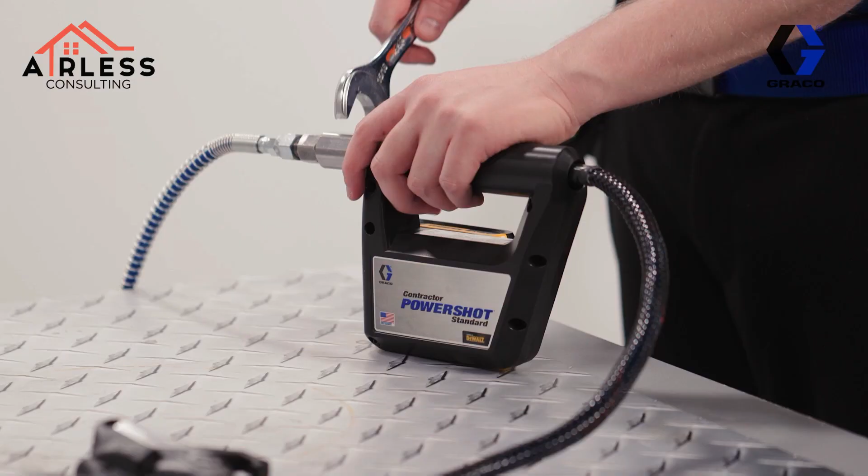You'll need to use a wrench. You simply wrench open the connection, and here you see the filter. As you notice, it's the exact same easy-out gun filter that we use with every Contractor series gun. It's inside-out filtration, proven performance — contractors know about this and will easily recognize it if they need to clean or replace their filter. Once you close it back up, make sure you wrench it completely to get it tight.

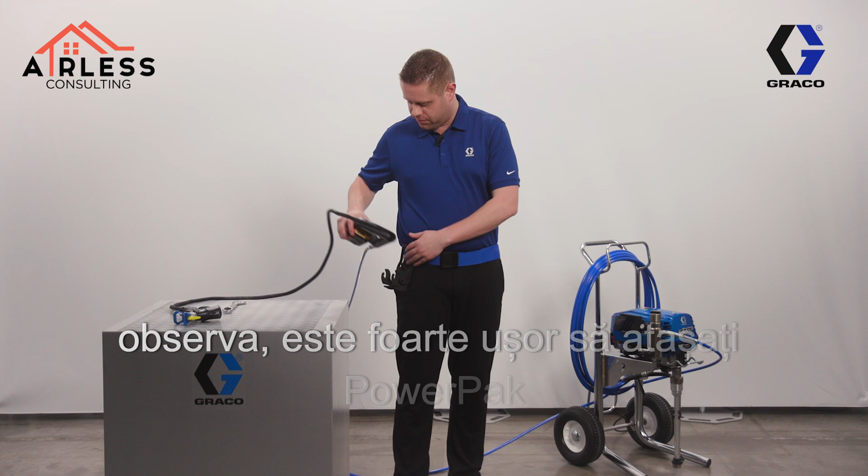We've also made sure there is hands-free portability. As you can see, we're including a belt and a holster with every PowerShot, and this will make sure you have easy hose-free management. As you'll notice, it's very easy to attach the power pack to your holster. Of course, if you're used to using your own belts, there's no issue—you can always attach the holster to your own belt as well. All of this will reduce hose management time and maximize your spray time.

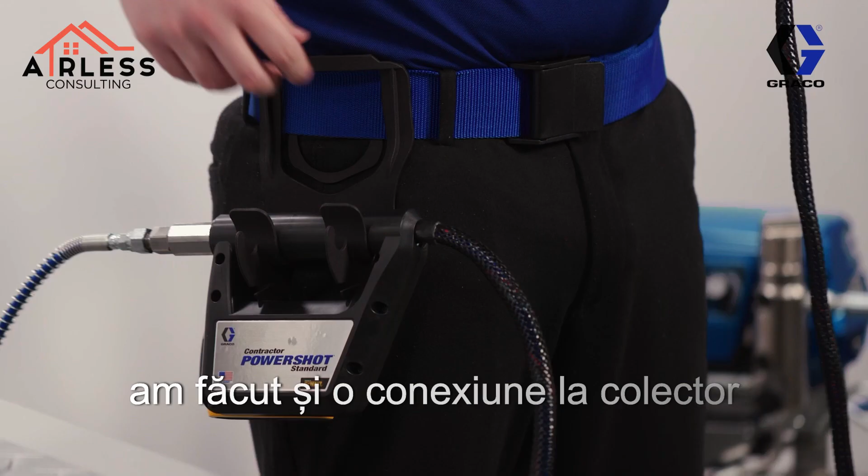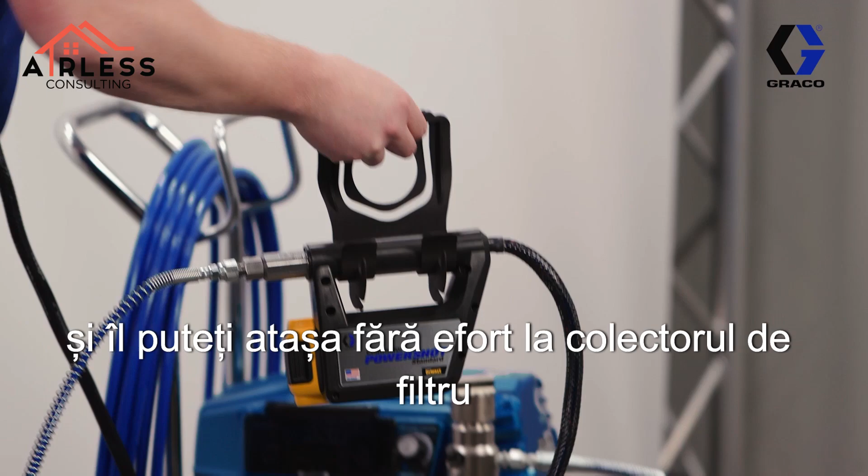Just to show you guys that we really thought of everything, we've also made a manifold connection to our holster. What does that mean? Imagine you've been spraying all day and want to take a break—all you have to do is take your holster and effortlessly attach it to the filter manifold like this. This connection will fit on every Graco sprayer manifold, and this will make sure you will never forget your holster or your gun, ensuring fast and easy transportation of both your sprayer and your gun.

So I hope you're all as excited as I am about this revolutionary new gun, and I'm sure the second you trigger it for the first time, you will be blown away. To summarize, the Contractor PowerShots will help contractors all around the world improve their finish quality, minimize fatigue, and eventually boost their profitability.

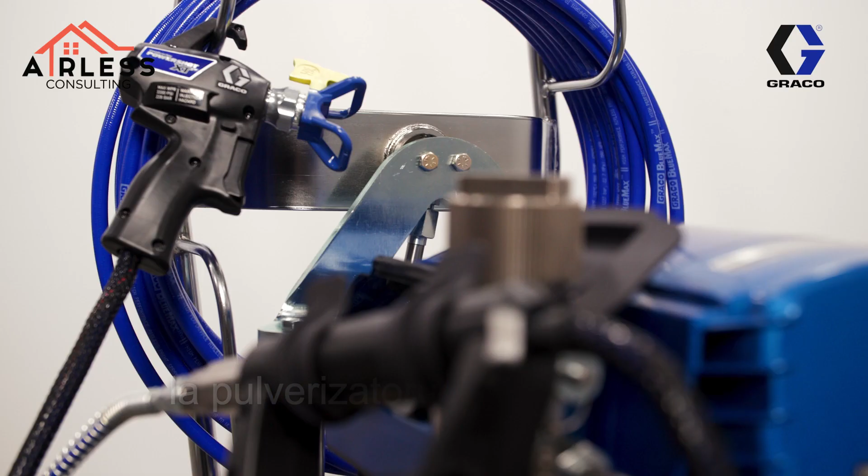But there's more—we did not stop there. So here it is, guys, the brand new PowerShot XT. This gun will connect to any Airless sprayer and will also give you the benefits of a Contractor PowerShot standard that we discussed earlier. However, once you connect this PowerShot XT gun to your Ultra XT sprayer, you will be able to unlock additional features and benefits.

One of those features and benefits is that it enables direct gun-to-sprayer communication, which will deliver next-generation performance and control. Another feature is that you can remotely adjust the pressure directly from this gun. And finally, with the new Contractor PowerShot XT, you will eliminate pressure surge and gun kickback with a complete new feature called SmartStall.

All right, let's now have a look at all those features a bit more in detail. The PowerShot XT works through radio frequency, which enables instant gun-to-sprayer communication that will reach up to 60 meters, even through walls and other potential obstacles.

To do that, you have to connect your PowerShot XT gun to your Ultra XT sprayer. It's extremely easy to do that—you just need 2 simple steps, and I will show you right now how to do that.

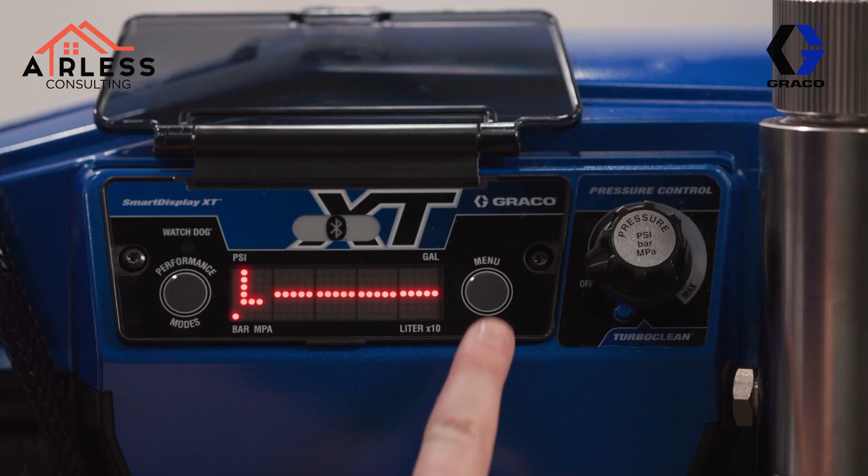It's very easy to connect your Contractor PowerShot XT gun to your Ultra XT sprayer. All you have to do is navigate through the display. Press the menu button once, twice, 3 times, and you will see it says pair spray gun. At that moment, press the menu button again for 3 seconds. It will say searching. Right now, take your PowerPack XT and press the plus and minus button at the exact same time. You will notice the screen will say gun connected. Right now, your Contractor PowerShot XT is connected to your Ultra XT sprayer.

Now that your Ultra XT sprayer is connected to your PowerShot XT gun, you will be able to enjoy all the features and benefits that come with this PowerShot XT gun. One of those features is the fact that you can remotely adjust the pressure on the gun, so you can easily dial in your desired pressure to meet the performance of any job by the simple touch of a button. You will find those buttons on the back of your power pack right here, where you see a plus and a minus.

This feature will offer you the fastest and easiest way to adjust pressure right where you are. That means you don't have to go back to your sprayer. You can just adjust the pressure right where you are spraying, whether that's on a boom lift, on scaffolds, on a ladder, or even in the basement. You can just adjust the pressure by pressing a button on your power pack without having to go back to your sprayer.

The great thing about this technology is also that the potentiometer on your sprayer and the remote adjustable pressure on your power pack work seamlessly together—whatever was last adjusted becomes your spray pressure. As I already told you, it has precision pressure adjustment up to 60 meters away, and it will even go through walls or other obstacles. Another thing I want to highlight, if you remember from the previous Ultra XT presentation, with the new Ultra XT sprayers, we have 2 different performance modes: a high pressure performance mode and a low pressure performance mode.

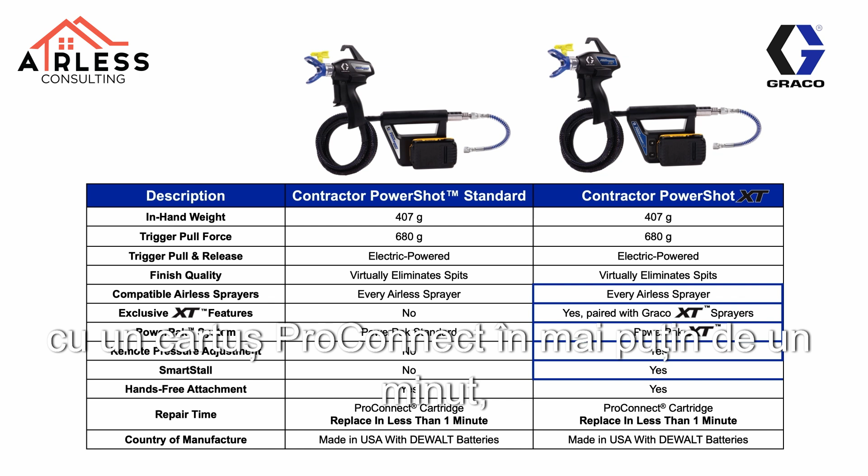Here's the final comparison between the Contractor PowerShot Standard and the Contractor PowerShot XT. Both guns are the lightest on the market with the lightest trigger pull force. Because of the electric powered gun, we virtually eliminate spits. Both guns are compatible with any airless sprayer. However, if you want to enjoy all the PowerShot XT benefits, you will have to pair it with an Ultra XT sprayer. The PowerShot XT gun comes with a Power Pack XT that remotely lets you adjust the pressure and gives you a brand new feature called SmartStall. Both guns can be repaired by the ProConnect cartridge in under a minute, and both are manufactured in the USA with DeWalt batteries.